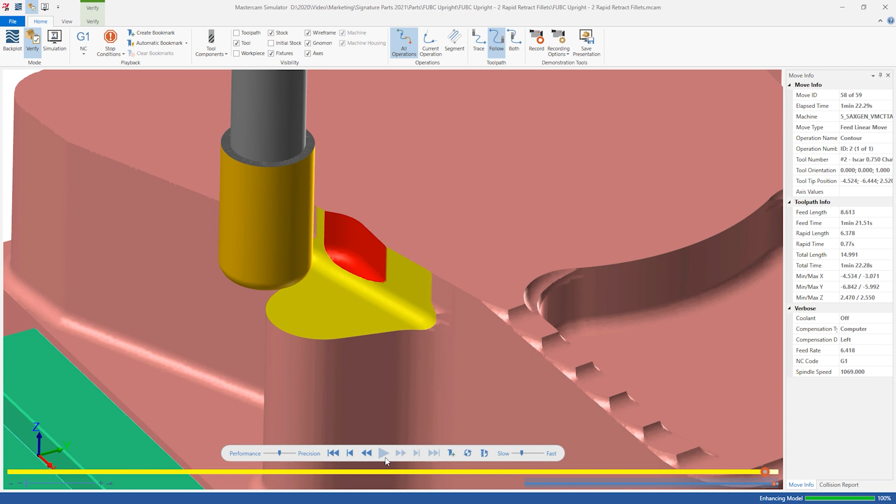If we backplot operation number 2, can we feel confident enough to run this operation for real? The answer actually depends on your machine. Let's run the same operation through Verify instead. Backplot and the graphical toolpath display looked ready to run. So where is this gouge coming from? The behavior that Verify is simulating here is called a dogleg rapid.

Some machines will not move in a perfectly straight line when a single rapid command moves 2 or more axes simultaneously. This is because each axis simply moves as fast as it can to get to its next position. This means that each axis can arrive at its commanded position at a different time. Generally, the X and Y axis have similar maximum rapid speeds, causing a 45-degree dogleg.

A machine that forces all axes to arrive at the commanded position simultaneously is said to synchronize its rapids. These machines deliberately force some axes to run at a slower linear speed, which makes the tool draw a perfectly straight line from start to finish.

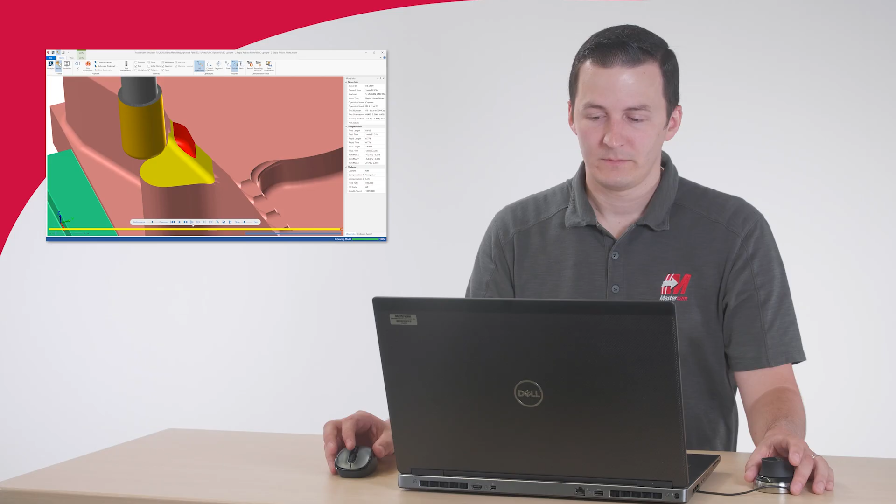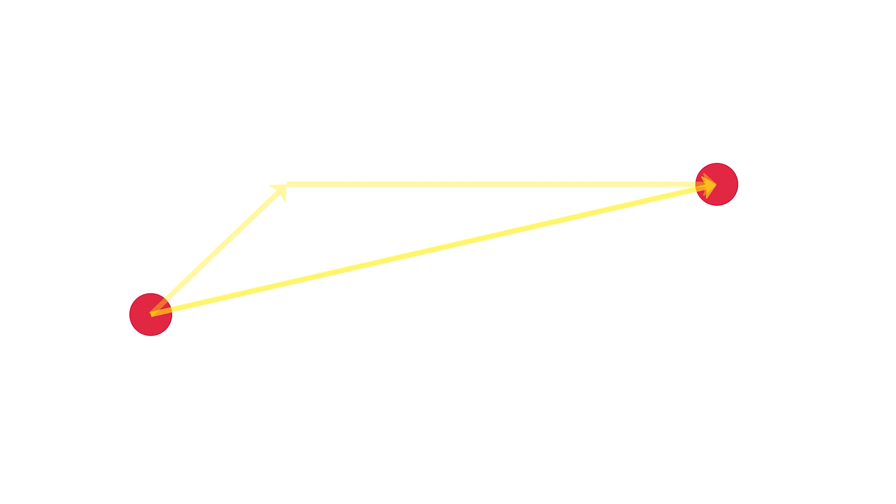Even though this rapid is a straight line in backplot, an unsynchronized machine will move more like this, causing the gouge we see. By default, Mastercam Verify assumes that the machine is not synchronized and that the rapid will dogleg. Mastercam Backplot and the Mastercam Graphical Toolpath display do not show this behavior.

If you have a newer machine that synchronizes its rapids and you don't want Verify to simulate doglegs, the behavior can be deactivated in the control definition. You must be positive that your machine synchronizes rapids before changing this setting.

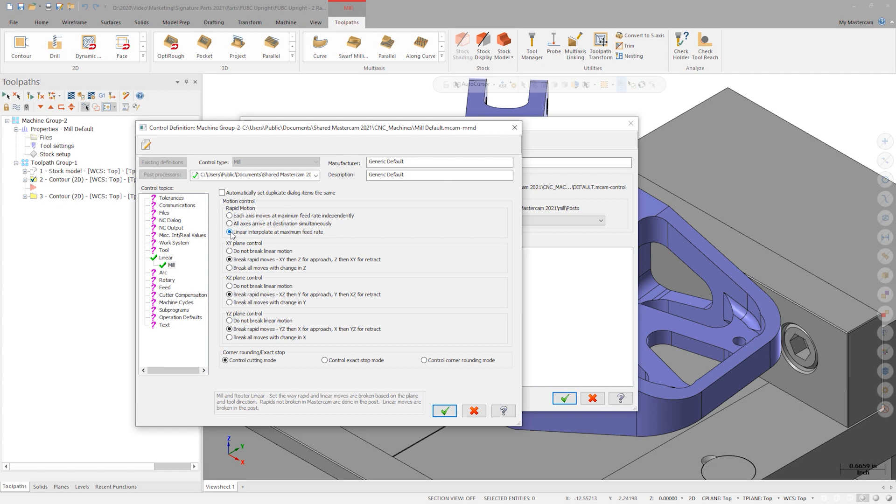There are 2 safer ways to avoid gouges caused by dogleg rapids. The first way is to convert the rapid to a feed move. Let's make this change in operation number 2 and regenerate. Verify now runs with no gouge.

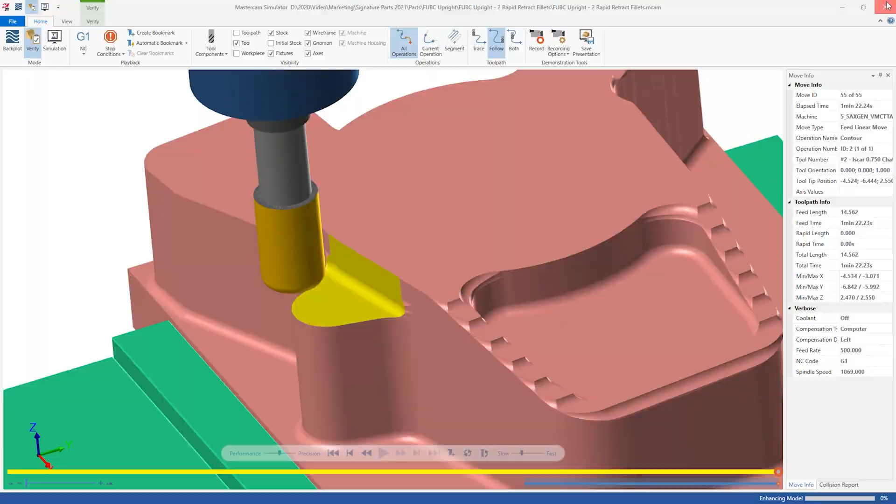The other method to avoid collisions from dogleg rapids is to simply raise the retract plane over the top of the stock, as shown in operation number 3.

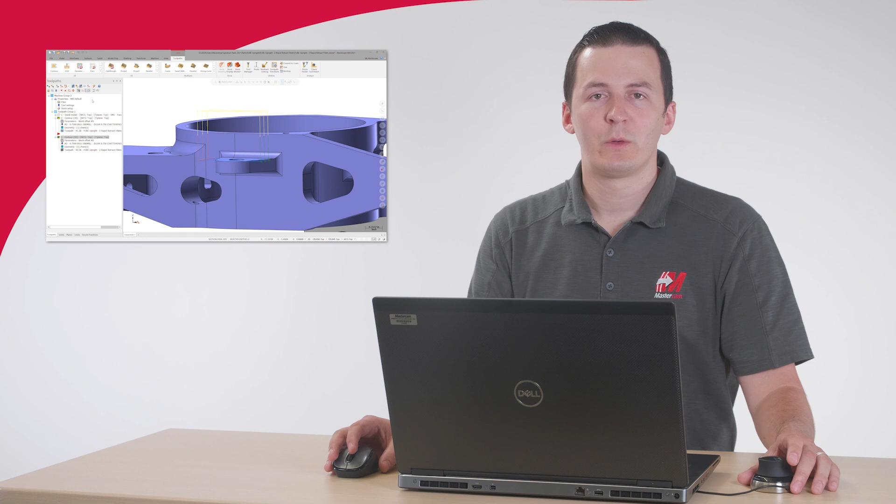Making sharp corners in the middle of a rapid can cause unnecessary wear and tear due to harsh axis deceleration and acceleration. This also means the tool isn't moving as fast as it possibly can throughout the entire rapid. Mastercam 2021 allows us to turn these sharp corners into a radius. Let's set the radius to 375 thousandths and regenerate the toolpath.

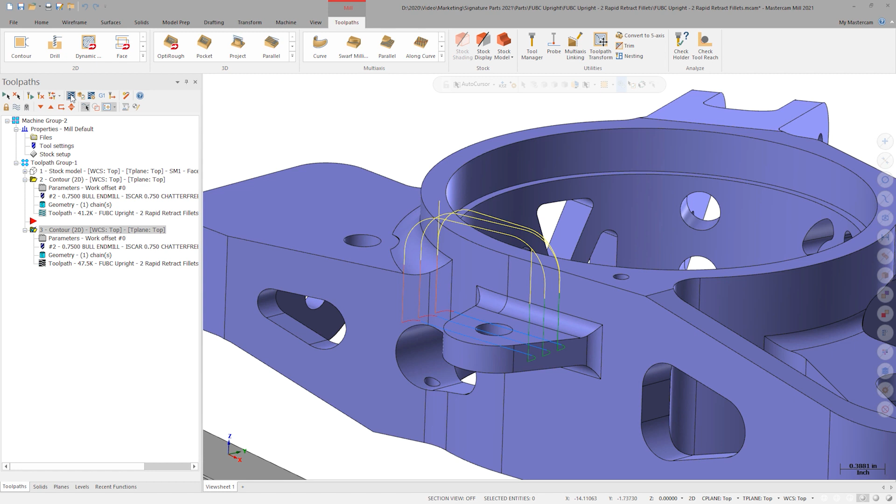We now see smoothly radiused corners in backplot. These radii are a series of straight G00 lines. No arc moves are created. A tighter cut tolerance setting for the operation will create more points in the radius. Generally, to maximize machine speed through the radius, it is necessary to keep the cut tolerance as loose as possible.

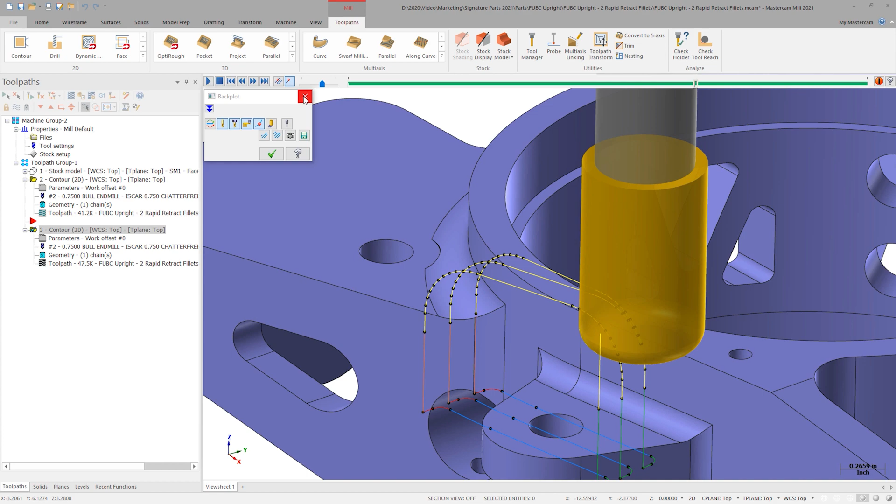Again, the straight line rapid between radii is still susceptible to dogleg motion depending on the machine. Testing in the Mastercam manufacturing lab showed a significant cycle time savings when using radiused rapid retracts. Combining the understanding of dogleg rapid motion with the new radiused rapid retracts in Mastercam 2021 will help you to truly optimize all segments of your CNC program.